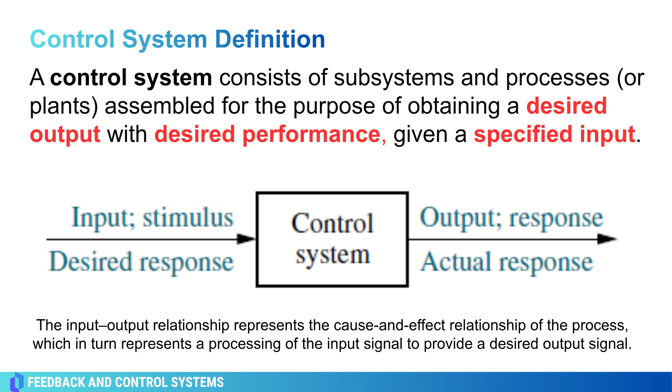For example, consider an elevator. When a fourth floor button is pressed on the first floor, the elevator rises to the fourth floor with a speed and floor leveling accuracy designed for passenger comfort. The push of the fourth floor button is an input that represents our desired output.

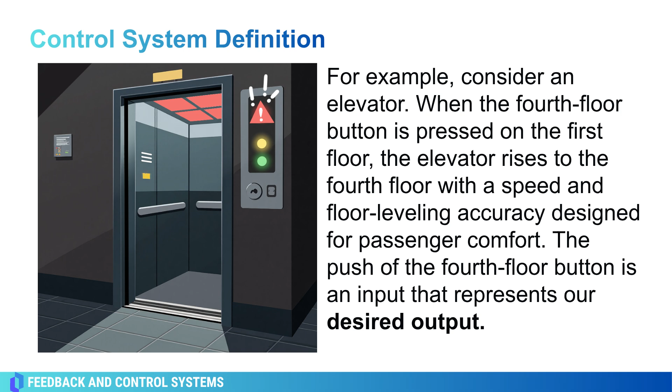So kapag kinlik natin yung number, for example, number 4, kapag kayo sumakay ng elevator, so definitely yung input natin na fourth floor button na pag-push natin doon, ayun yung tinatawag na desired output kasi gusto nating pumunta sa fourth level. The performance of the elevator can be seen from the elevator response curve in the given figure.

So we have the two major measures of performance: first, the transient response, and another is the steady state error. Sa ating example, the passenger comfort and the passenger patience are dependent upon the transient response. If this response is too fast, sobrang bilis ng elevator, so the passenger comfort is sacrificed. And on the other hand, kapag sobrang bagal naman, so the passenger patience is sacrificed.

Meanwhile, for the steady state error, it is another important performance specification since the passenger safety and convenience would be sacrificed if the elevator did not properly level.

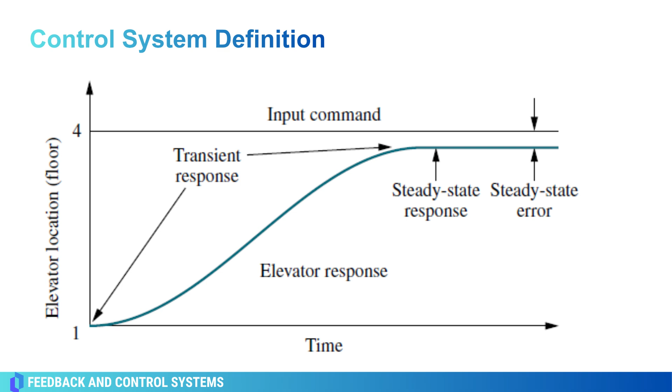So as you can see here, given number 4 is your input command, and for the transient response, it is the patience and comfort. Then afterwards, for the steady state response, as it approaches to our desired output, which is level 4, we can see the steady state error as there are errors in the performance specification of the elevator.

Early elevators were controlled by hand ropes or an elevator operator. Here is a rope which is cut to demonstrate the safety brake. An innovation in early elevators: one of two modern dual lift elevators makes its way up to the Grande Arche in Paris. Two elevators are driven by one motor, with each car acting as a counterbalance to the other.

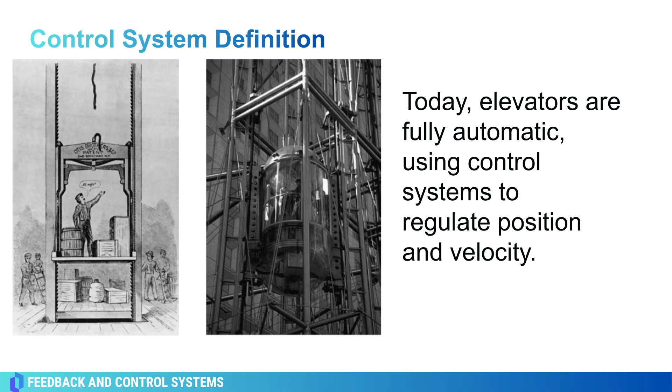Today, elevators are fully automatic using control systems to regulate the position and its velocity. With control systems, we can move large equipment with precision that would otherwise be impossible. We can point huge antennas toward the farthest reaches of the universe to pick up faint radio signals. Controlling these antennas by hand would be impossible. Because of control systems, elevators carry us quickly to our destination, automatically stopping at the right floor. We alone could not provide the power required for the load and the speed.

Motors provide the power and control systems regulate the position and speed. For example, a radar antenna positioned by the low power rotation of a knob at the input requires a large amount of power for its output rotation. A control system can produce the needed power amplification or power gain.

Robots designed by control system principles can compensate for human disabilities. Control systems are also useful in remote or dangerous locations. For example, a remote controlled robot arm can be used to pick up material in a radioactive environment.

For example, in a temperature control system, the input is a position on a thermostat. The output is heat. Thus, a convenient position input yields a desired thermal output. Another advantage of a control system is the ability to compensate for disturbances.

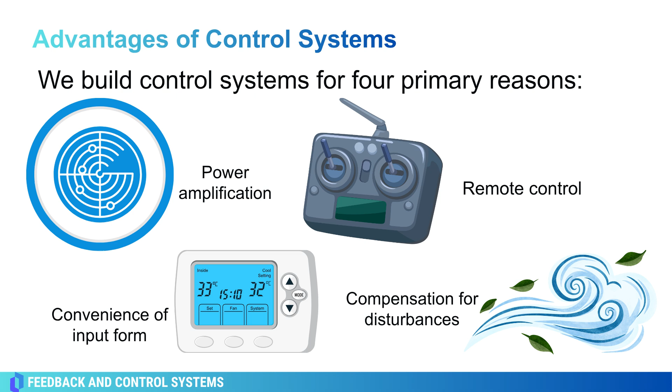Obviously, the system's input will not change to make the correction. Consequently, the system itself must measure the amount of the disturbance, reposition the antenna, and then return the antenna to the position commanded by the input.

Now let's dive in with the history of control systems.

First, in liquid level control, the water clock or clepsydra, invented by the 3rd century BCE Greek engineer Ctesibius in Alexandria, improved timekeeping by using an automated feedback system. Water trickled into a vessel at a steady rate, raising a float connected to a pointer or mechanical gear system to show the passing hours accurately.

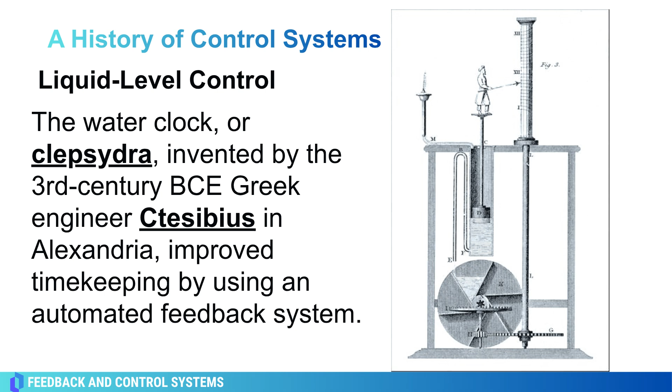Another in liquid level control, we have Philon of Byzantium. Around 250 BCE, it is a groundbreaking early invention in self-regulation and feedback control. It automatically maintained a constant level of oil in the burner reservoir to ensure an even, uninterrupted flame without human intervention.

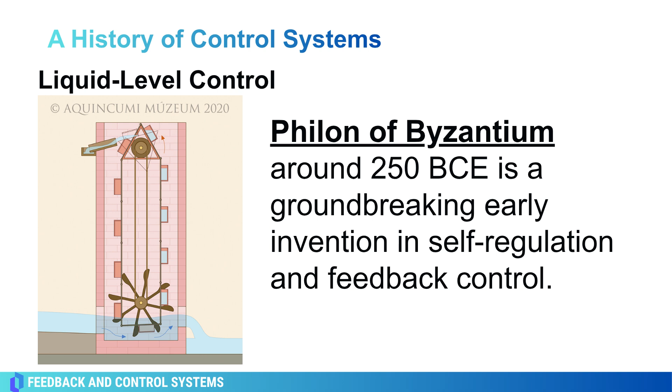In 1679, French physicist Denis Papin invented the safety valve for his steam digester, an early form of the pressure cooker. After early prototype vessels exploded under high steam pressure, Papin created a pressure relief deadweight valve using a weighted lever arm to safely vent excess steam.

So how did the safety valve work? For weighted control, a small plug or piston was set over a release hole in the lid, held down by a movable weight on a lever arm. For pressure release, when steam pressure inside the iron pot rose past the weight's limit, it pushed the valve open to vent steam.

Releasing the excess pressure kept the vessel stable and prevented catastrophic failures. So, part of the history of control systems is the invention of the pressure cooker.

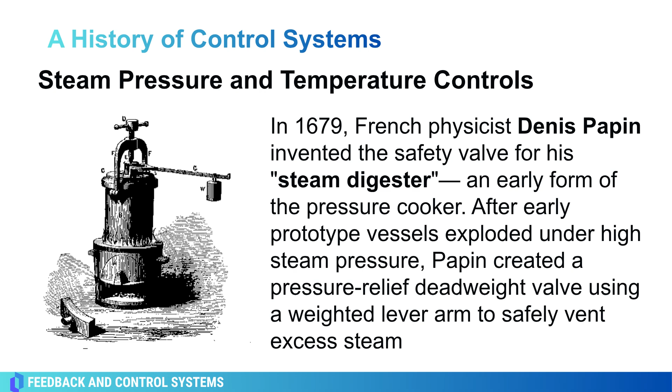Temperature controls: in the 17th century, Dutch inventor Cornelis Drebbel invented an early mechanical thermostat and self-regulating incubator for hatching eggs. This device is widely recognized as one of the first recorded feedback-controlled mechanical systems in history. So how does it work?

A fire or alcohol-powered lamp warmed a water jacket and air surrounding the egg chamber. A glass vial containing a mix of alcohol and mercury was placed inside the heating system to monitor the temperature. As heat increased, the liquids expanded and pushed a float upward. The float was linked to a damper that choked or opened the airflow, adjusting the flame intensity automatically to keep a steady temperature.

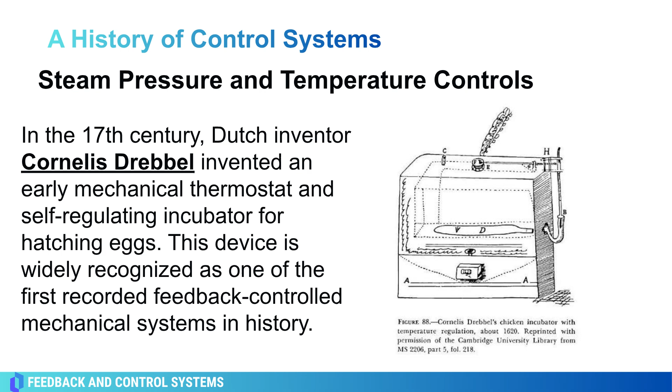For speed control, inventor Sir William Cubitt created the patent sail in 1807. It uses movable wooden louvers or shutters on windmill sails. A remote control system adjusts these louvers like a Venetian blind while the mill turns. This keeps the speed safe and steady without stopping the machinery.

How does this system work? Each sail uses small wooden slats similar to window louvers. A rod runs through a hole drilled directly inside the main windshaft. Connecting rods and bell crank levers link the central control rod to the slats. A chain and hanging weights on the ground pull the linkage, acting like an umbrella to open or close the louvers automatically.

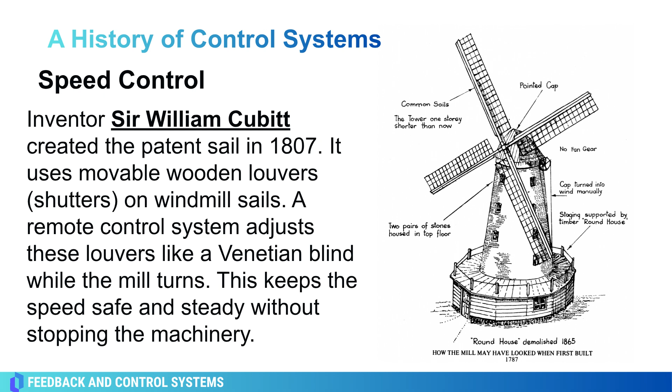James Watt adapted and refined the centrifugal flyball governor in 1788 to control the speed of his steam engines, though the underlying centrifugal concept was already used earlier in the 17th century for windmills and water wheels.

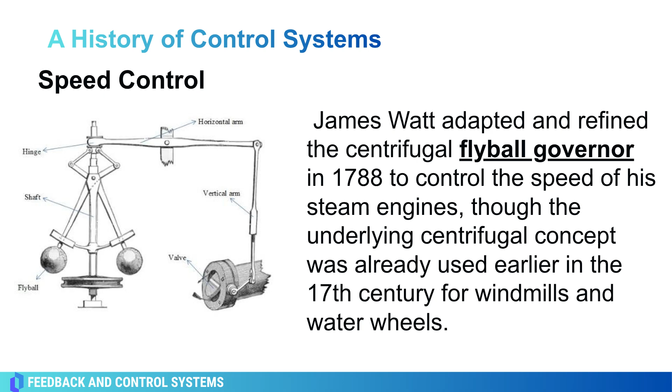How the governor works: a belt connected to the engine spins a vertical shaft. Higher engine speeds cause the weighted metal flyballs to swing outward and upward. Linkages pull a sliding sleeve which partially closes the steam throttle. Slower speeds drop the balls inward, opening the valve to increase the power of the steam.

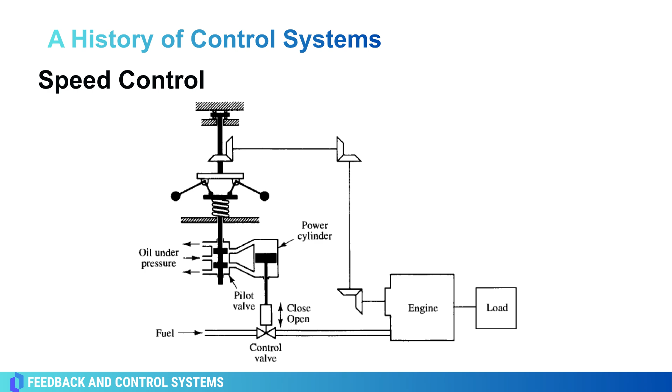Under stability, stabilization, and steering: in 1868, James Clerk Maxwell published the stability criterion for the third order system based on the coefficients of the differential equation.

In 1874, Edward John Routh, using a suggestion from William Kingdon Clifford that was ignored earlier by Maxwell, was able to extend the stability criterion to the fifth order systems.

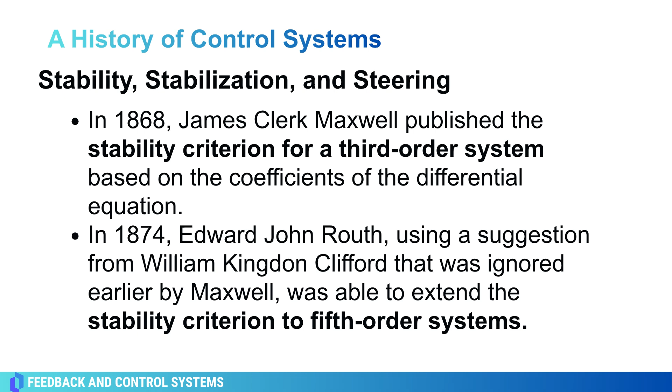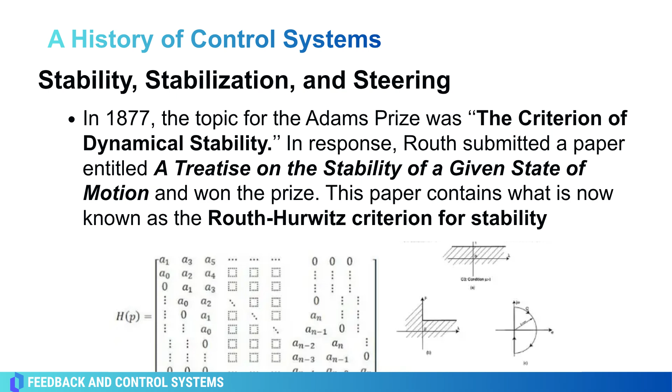In 1877, the topic for the Adams Prize was the criterion of dynamical stability. In response, Routh submitted a paper entitled 'A Treatise on the Stability of a Given State of Motion' and won the prize. This paper contains what is now known as the Routh-Hurwitz criterion for stability.

Moreover, in 1874, Henry Bessemer used a gyro to sense a ship's motion and, applying power generated by the ship's hydraulic system, moved the ship's saloon to keep it stable.

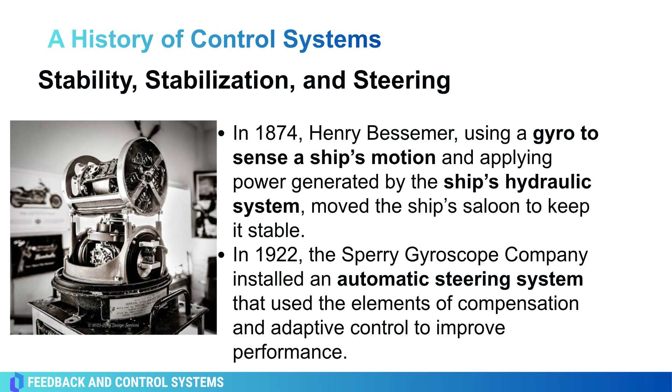In 1922, the Sperry Gyroscope Company installed an automatic steering system that used elements of compensation and adaptive control to improve performance. Nicholas Minorsky, a Russian born in 1885, developed the theory applied to the automatic steering of ships that led to what we call today proportional plus integral plus derivative, or PID, the three-mode controller.

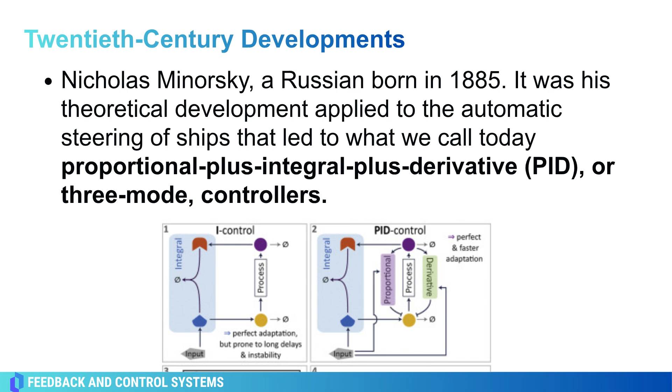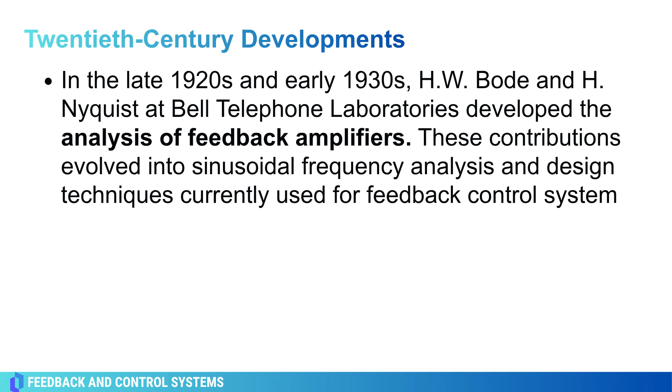In the late 1920s and early 1930s, H.W. Bode and H. Nyquist at Bell Telephone Laboratories developed the analysis of feedback amplifiers. These contributions evolved into sinusoidal frequency analysis and design techniques currently used for feedback control systems.

In 1948, Walter R. Evans, working in the aircraft industry, developed a graphical technique to plot the roots of the characteristic equation of a feedback system whose parameters change over a particular range of values.

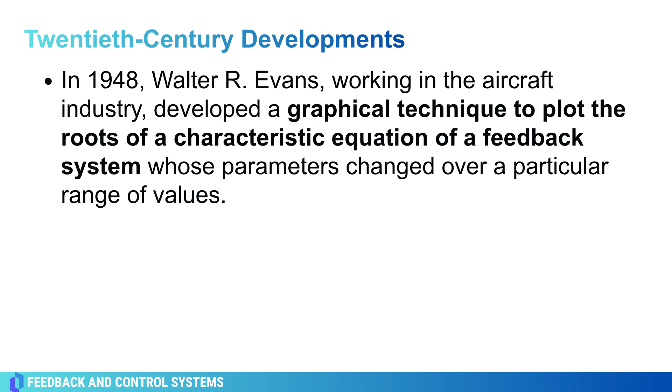Before we proceed to the discussion of open loop and closed loop systems, let's have the basic terminologies. First is the controlled variable: it is a quantity or condition being measured and controlled.

On the other hand, the manipulated variable is a quantity or condition that is varied by the controller so as to affect the value of the controlled variable. So remember, when it is measured or controlled, it is the controlled variable; and when it is the one we vary in order to affect the value of the controlled variable, that is the manipulated variable.

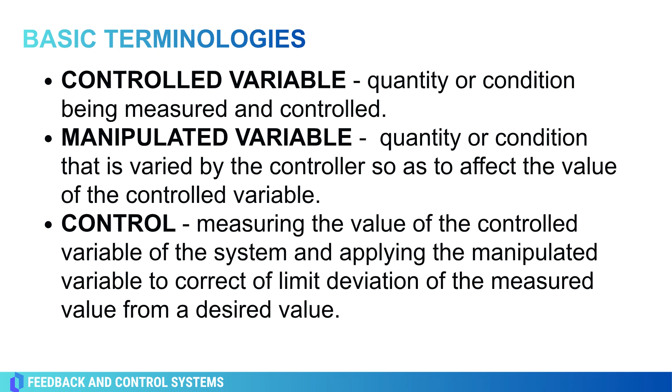Control, by definition, is measuring the value of the controlled variable of the system and applying the manipulated variable to correct or limit deviation of the measured value from a desired value.

When we talk about plant in feedback and control systems, it may be a piece of equipment, perhaps just a set of machine parts functioning together, the purpose of which is to perform a particular operation. Example: it is any object to be controlled, such as a mechanical device, heating furnace, chemical reactor, or a spacecraft.

Processes: a series of actions that produce something or that lead to a particular result.

For system, it is a group of devices or artificial objects, or an organization forming a network, especially for distributing something or serving a common purpose.

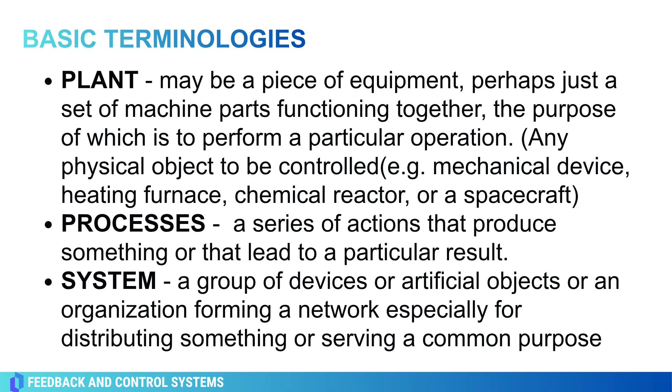Disturbances: an unwanted external or internal signal that adversely affects the system's output value.

For feedback control, it is a core process in a closed-loop control system that measures the actual output of the system, compares it to the desired reference input or set point, and uses the difference or error to adjust the system action and reach the target.